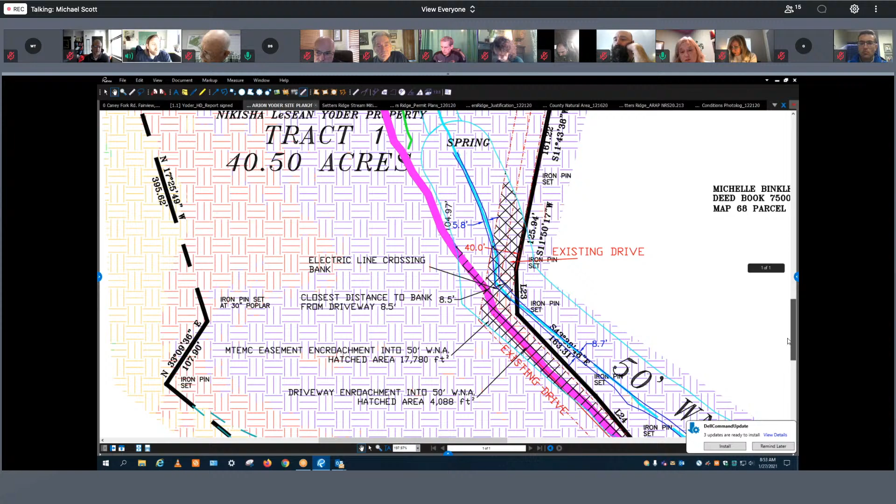Yes, so the request is to install a driveway and clear for electric overhead utilities, and part of it runs within a 50-foot stream buffer. And then the building site is further back on the property away from the creek, but the waiver is for the driveway and the electric to run within a portion of the 50-foot stream buffer. But it looks like their property is on the right-hand side of the road. Are y'all going to do something to the bank over there at the creek, or make more erosion down our way in the creek there?

I don't understand. They're wanting to waive it because of the creek bank. That's what I was concerned with, because my kids play and swim in the creek. Now we got developing going on around us, and every time it rains, a half-inch rain, it looks like chocolate milk running down through there right now. It didn't used to be that way. That's my concern. But if it's up on that hill, why would that be affecting the creek bank? I guess is what I'm asking. Why are we trying to waive this section? Well, this is a tributary. This is a smaller creek. This isn't Caney Fork proper. It's a smaller tributary that runs along the edge of Mr. Yoder's property.

Okay, and the driveways. I mean, that's what I'm trying to figure out. Whatever erodes down in there. I mean, how much erosion are we talking going down in there and going back down Caney Fork Creek down our way, and then eventually coming into South Harpeth where I live?

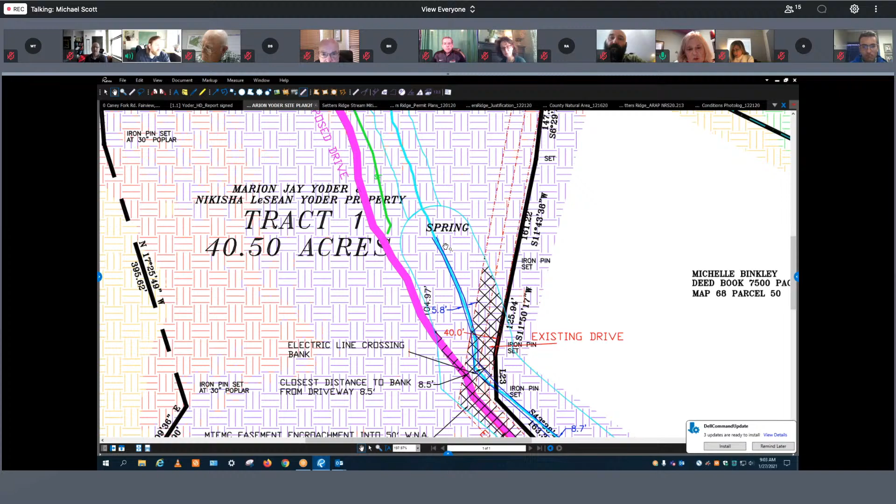And as a stream, obviously, that's when you get the waterway natural area protections. So if I transition over to the site plan here, the surveyor has located the spring to be consistent with Mr. Grove's assessment. And from that point down to Caney Fork proper, you've got an intermittent or perennial stream. Does that answer your question?

Yes, and I also wondered if we could get a more detailed topographical map. What is from the road up to the building site? What's the difference in altitude? The elevation difference, based on this county map, and it is hard to read. I can't make out the numbers here, but each one of these lines represents 5 feet. Yes, sir. So up here we've got 850s, 810s, and down here, just eyeballing, maybe 50 feet, maybe a little more. Okay, thank you.

Thank you, Michael. Maybe 75. It kind of depends on where you're talking about, because if you go down to the road, you're at 700 or lower, and up here you're up at 850. So total difference is like 150 feet. But if you're going up here from the spring, it's probably 50, 60, 70 feet of elevation change. Yes, thank you.

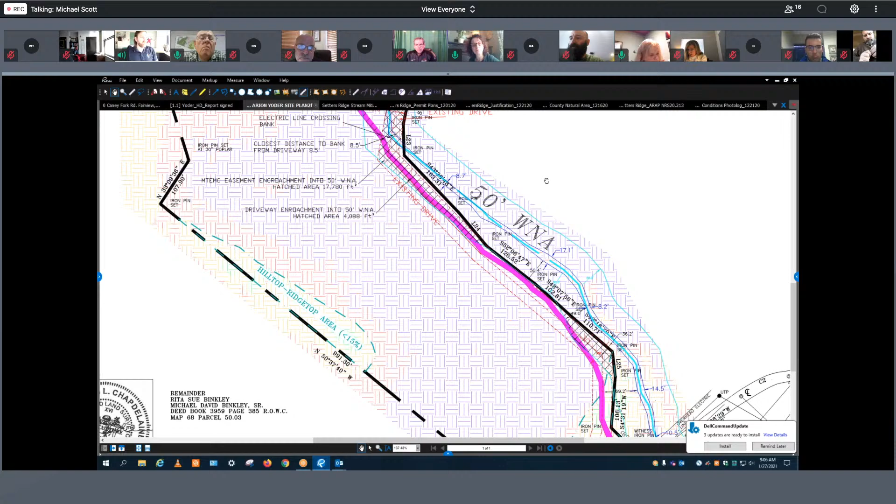So this is Michael. So the first requirement is to submit the assessment to the state, which we could verify, but typically these are pretty accurate. The next thing would be, with his crossings, he would have to be consistent with any state ARAP permitting. For an overhead crossing, I don't think you have to formally submit any type of application to TDEC. You would just go based on their general ARAP permits, which are available online, and you can look through those.

An aerial crossing, you can typically do that without submitting any information. It's only when you have a certain width of crossing, or you're needing an individual crossing, or other things that you'd have to formally submit an ARAP. So in this case, I think he would probably just follow general ARAP permitting.

Thank you. Michael, will you leave that right there? It says electric line crossing right in the middle of your picture. Is that presupposing that the electric is on the stream side and then will be crossing? That's not what he stated in his proposal to us. Yes, that is a crossing of the electric across the stream.

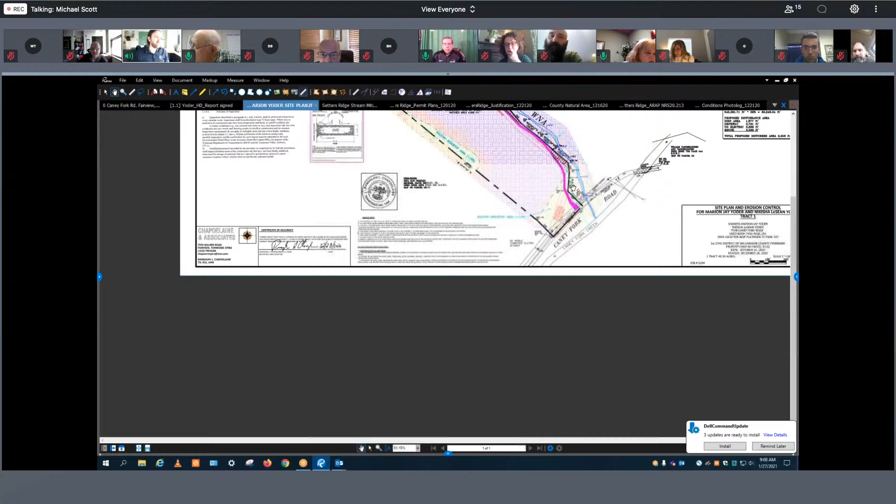Yes, the electric comes up, and I'll go all the way back down here, but the proposed electric comes in, I guess, from the south. Let me make sure I'm looking at this right. Yeah, it comes in from the south here, and it goes up and it follows the creek to the southwest. And then it will cross the stream up in the upper reach right here.

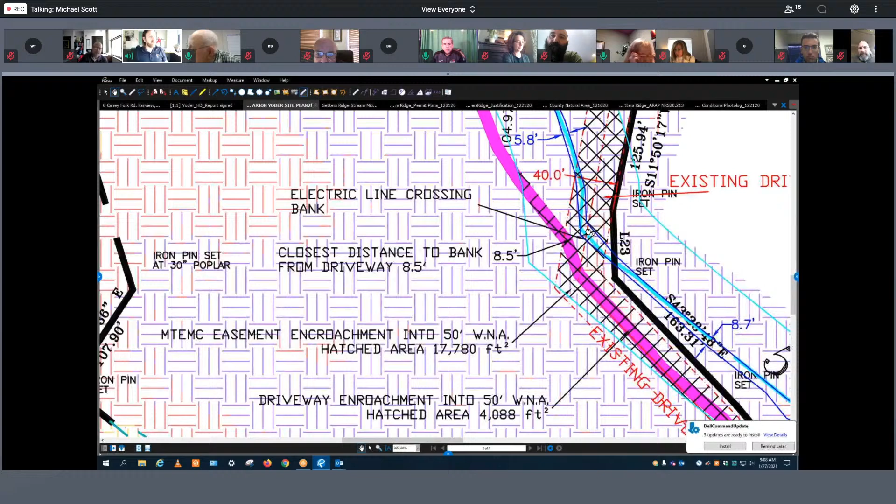But it doesn't follow the driveway all the way up to the house. It takes a separate route across the stream. It looks like it's on both sides of the driveway coming up, and so on. So it's not following the left-hand side of the rising driveway. It's got its own path. Is that a true statement?

Correct. It splits right here, and the surveyors cross-hatched the areas. That's what that cross-hatching is. But yes, they split the power and the driveway at this point. I guess my question is, is it a true statement that the electric will always be on the left side and we will not be clearing overhead on the stream side, or is that a false statement?

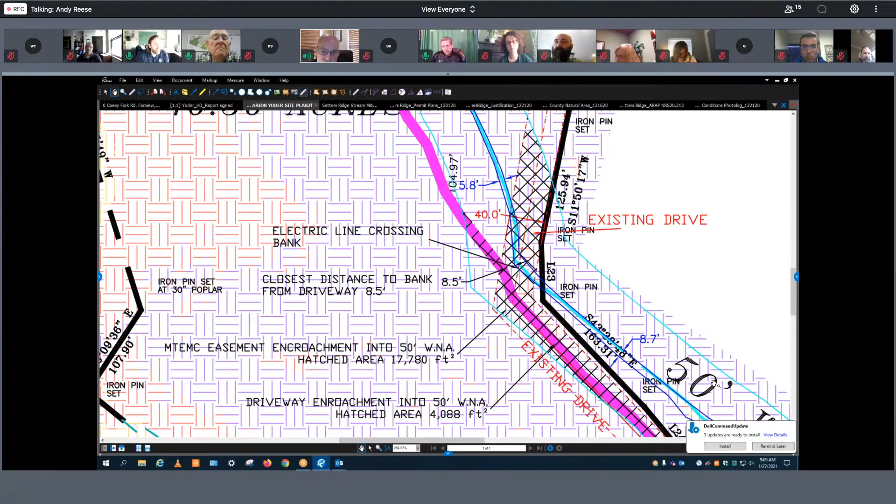Well, I think he would have to clear this 40 feet, which is over the creek at this point. Sure. I'm looking at the rising portion up to that split. Up to the split, it's going to stay to the south side. It's going to stay over here from the creek. Okay. Not sure that that's what it shows, but you have cross-hatching that goes on the creek side. On the north side? Yeah.

Michael, is it your understanding, and Mr. Yoder, that entire 40-foot easement, does Middle Tennessee or the electric utility require that it all be cleared, or will they clear that for you? What's the long-term status of the maintenance of that 40 feet? Yeah, this is Jay Yoder. The 40 feet has to be cleared by myself, which I plan on doing.

But as far as your question, yes, the driveway on the initial part up to where the electric crosses the stream, the power poles will be on the southwest side of the driveway. From there, it follows where the existing road runs north along the property line. There is still an existing drive there, and I'm running the power that way, but I'm not planning on taking my drive north. I'm planning to continue northwest up towards where it crosses the wet weather conveyance.

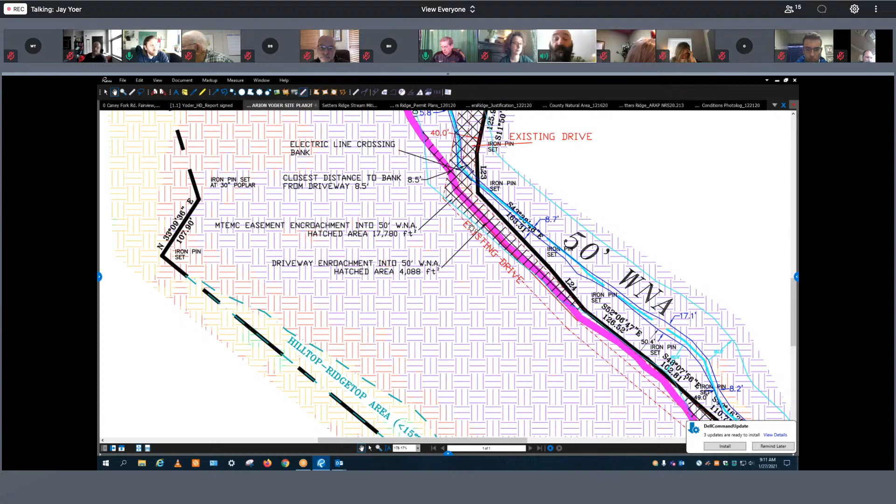That is correct. Right there where it crosses the stream, it's kind of tight, so I may have to clear that area. But beyond that, no, I'm not planning on clearing down toward the stream at all. I'm going to try to push it as far away from the stream as I possibly can, except where it crosses there, where I'll probably have to clear a little bit.

Floyd, any other questions? Were you asking about the long-term maintenance, Floyd? Yeah, this is Floyd. Michael, I knew that you had some understanding about what the utility required as far as that easement goes. Is it the same as any easement of theirs, they can come in and clear it if they want, or do they not do that on private property?

Yeah, so what they do is they hire subcontractors, depending on whatever bids, I guess, that they win. But they come out and if you don't keep it clear, they'll hire subcontractors to come out and clear it, pretty much at their will. And that could include anything from, I've seen, spray to just going out there and just cutting everything. But somebody's going to keep that 40-foot right of way clear in perpetuity.

Any other questions? Mr. Lamb, do you have a question? I guess I've gotten a little bit confused, so I just want to be sure. I want to kind of describe what I think is going on to make sure that I'm grasping it correctly. So based on the visuals we've seen, there is no crossing of the existing stream with the driveway. That crossing is only going to be in the wet weather conveyance area. The electric will cross, but it's going to be an overhead electric.

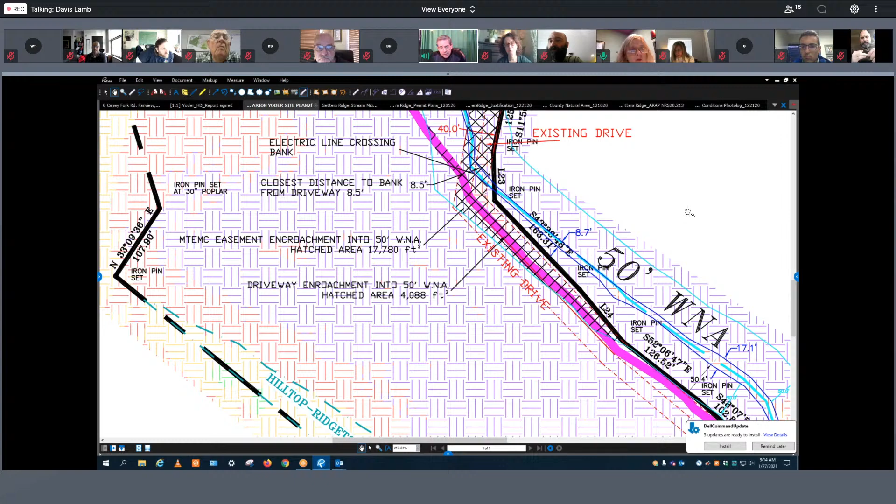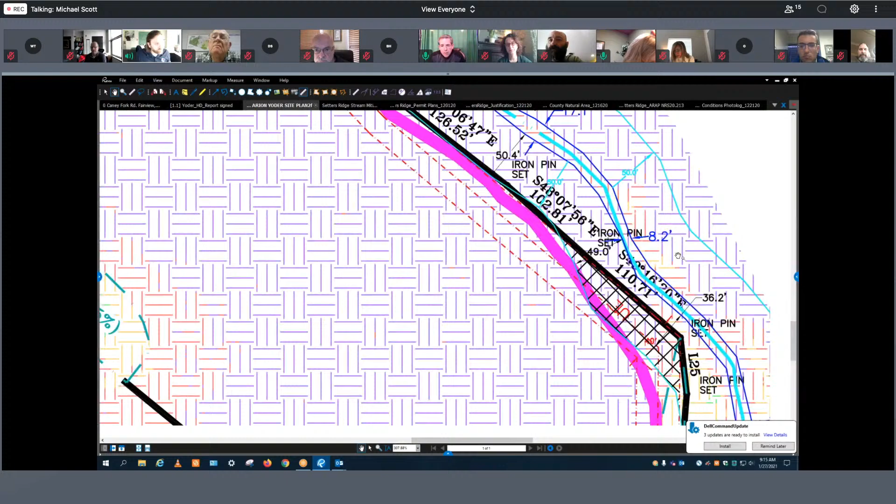It looks to me like we're 40-ish feet or so, or we're hugging the edge of our 50-foot, I think. I see a 50.4 distance called out. Right, it's 50 feet here. And of course, back in here is also inside of it as well. And he's got some points here and there measured, but he put this in square footage, like 4,088 square feet, but that doesn't help with the distance to it.

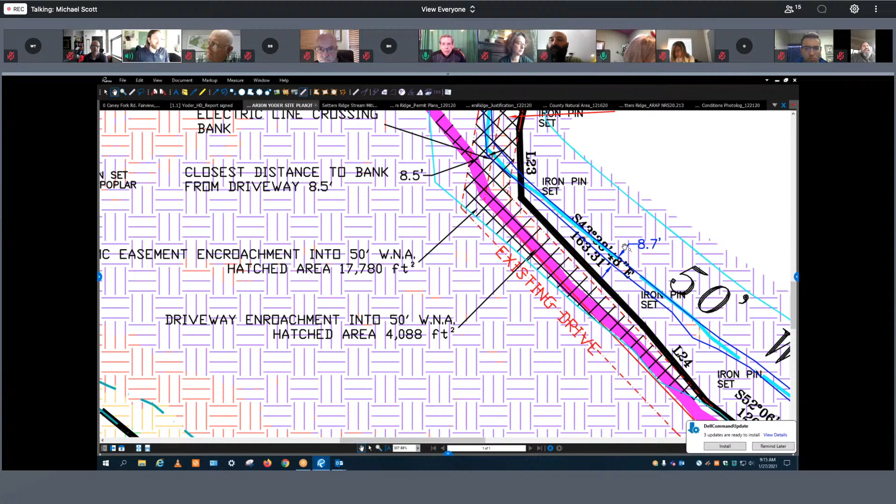I would say it definitely gets, I mean, if you would like, I could scale it. I don't know if that helps. No, that's helpful. And he's hatched, I guess, the areas that are for focus. I was just trying to make sure I was capturing. We're not crossing. At some point I got confused. We're not crossing the stream with the driveway, only with the overhead electric.

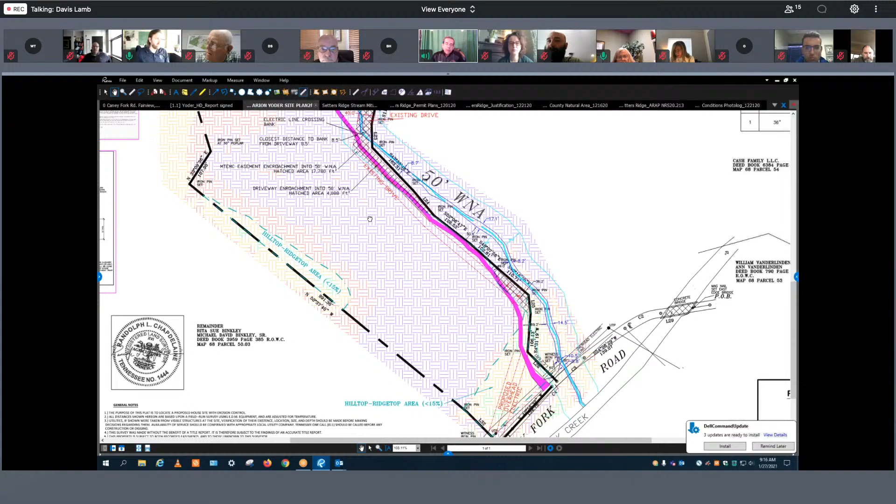I'll do one more, I guess, so that I'm not continuing to distract. The other thing that I heard Mr. Kinney say, if we get to a point of talking about a motion, that would make sense is for us to require a high side diversion ditch on the driveway. When we decide to move forward, that's something that's on my mind that I'd like to see us do. So with that, I'll be quiet and listen.

Any other questions, commentary? Thank you for the summary. I was about to think we needed to do that, Davis. I appreciate it.

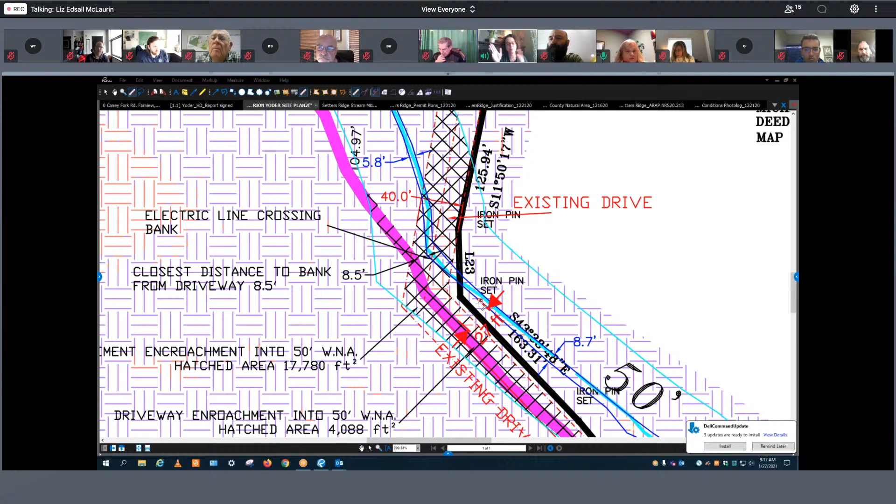This is Liz McLaurin. I do have one other clarifying question. The summary states that the driveway and electric would run parallel with the stream, affecting approximately 600 feet of length in the WNA. So is that still accurate, based on the fact that I now see there is a split that makes the driveway not cross the actual stream, but just the wet weather conveyance?

Is that still correct, that we're losing, in a sense, half of the buffer, or it's disturbing half of the buffer, in the length of 600 feet? Is that correct, Michael? This is Michael. Well, that's a difficult thing. What I did, just so you understand where that 600 came from, because there's variance within that.

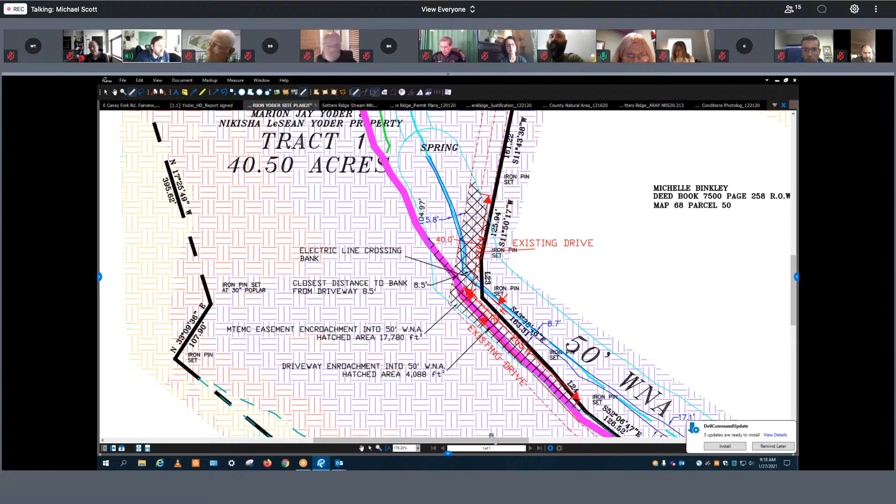Some places it's 5 feet of an encroachment, and some places it's 25 feet, or it's right across it. I basically measured the hatched area that the surveyor had provided. So I went and measured the 170. It's hard to see, but 175 feet here, and this cross-hatched area I measured here at 265 and down there, and I added those areas together. That's kind of where I got the 600 feet. I don't know if that helps or not. Yes, it does. Thank you.

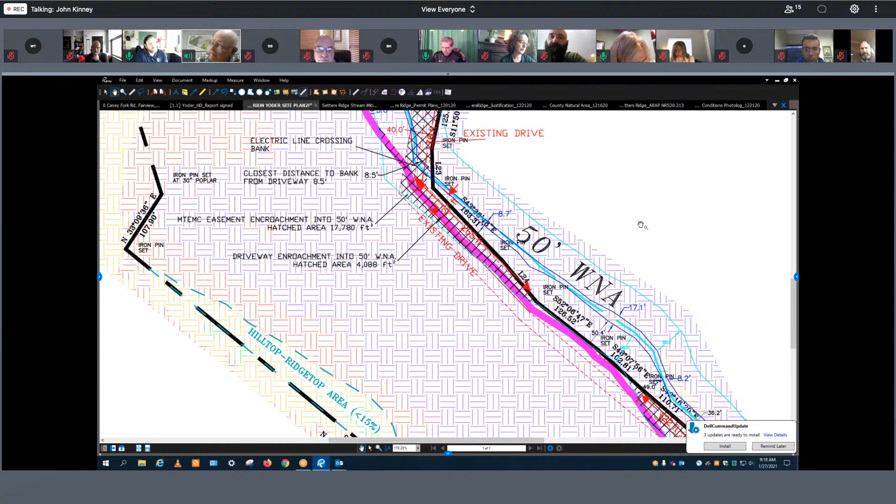Any other comments, questions from the board? Yes, this is Mr. Kinney. I went out and looked at the site, and the lower part of the road, at the bottom is a rock bluff there, and I don't understand why Mr. Yoder went around that way, because he's gonna have to blast the rock bluff down if you do, and that's gonna cause erosion from up above.

But to me, this road is where it was established to start with, and it's going to be hard to control the upper side, getting it sowed down with grass, but there's nothing else you can do there right now other than that.

But I'd like to make a motion on that to let the road stay where it is, have a ditch put on the upper side of the road where the water won't drain down across the road into the stream, put up a silt fence on the lower side of the road, no more land disturbance in the winter. What disturbance will be for clearing the right of way for the electric will be cutting the trees down, leaving the stumps to help hold the land. And somebody else may want to add something to that right now.

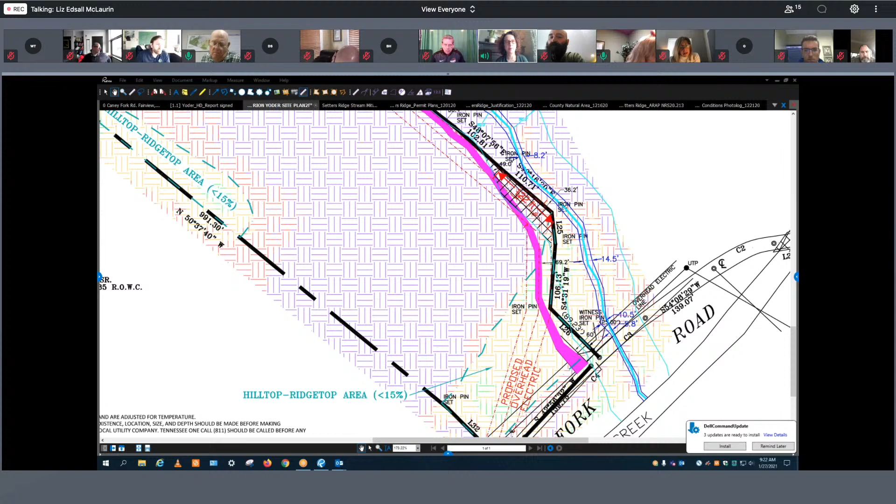Well, listen, Mr. Kenny, as far as the silt fence or sediment barrier, it doesn't have to be a silt fence. Like Mr. Yoder said, he was going to maybe put rock on that lower side to hold it. It's something that'll be permanent, where a silt fence wouldn't be a permanent thing. This is Liz McLaurin. I'm in concurrence with something that would be more permanent than a silt fence. Certainly, during construction of the road, that would be important, but I also visited the site and had more than an intuitive sense that there would need to be stabilization on that stream side of the road.

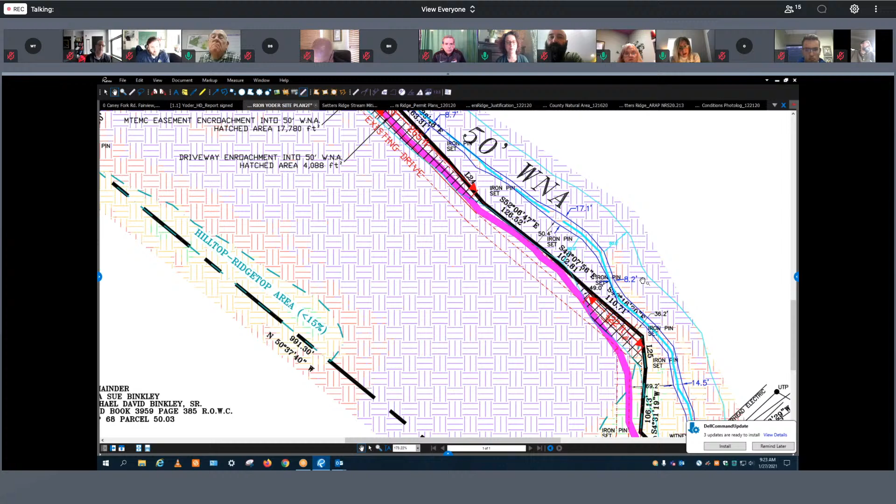Mr. Chairman, this is Christy Ransom. At this point, you have a motion pending without a second. So before there's any further discussion, there needs to be a second if it's going to be a viable motion. I second it. Okay, I'm just trying to clarify the motion. So we have a second. Any further discussion of the motion? As I understand, there are 4 conditions to the motion other than approval of the road. So it's the road stays where it is, number 1. 2, ditch on the upstream side. 3, a permanent sediment barrier of some kind, protection on the downstream side.

What was the 4th one? Oh, clear by hand on the upstream side. Not use equipment or whatever. Did I articulate those 4 conditions correctly? Does that seem what we said, Liz or Mr. Caney? Yes, yes, it is. Okay. Any further discussion on the motion?

Okay, hearing no further discussion, let's do a roll call vote. Christy? John Kenny, yes. Brad Hoot. Oh, he's recused. Recused. Floyd. Yeah. Betsy Hester, yes. Davis Lamb, yes. Robbie Adams, yes. Liz McLaurin, yes. Andy Reese. Yes. So the motion carries.

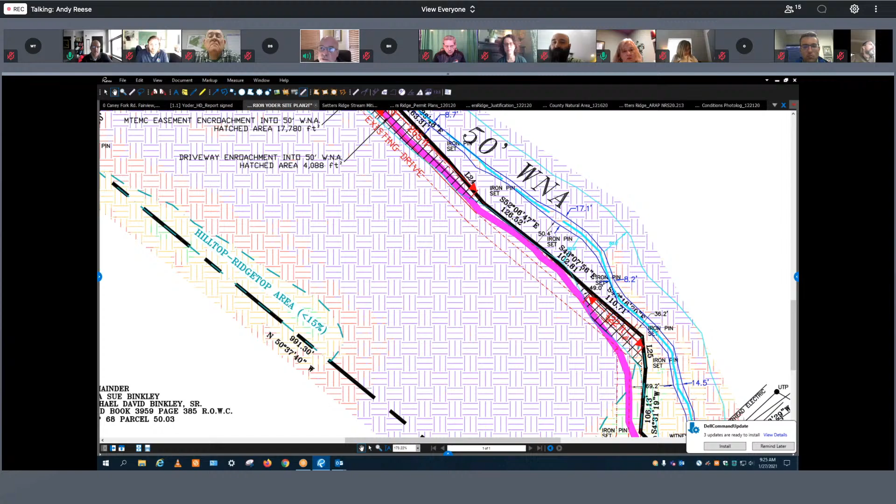Thank you, Mr. Yoder. Appreciate you coming to us and your efforts to put that home place up there and do it right. Appreciate that so much. Let's move on to the next item then, which would be item number 3. And who will be speaking for that item? Anthony, is that you? Are you speaking? Yes, I'm Anthony Brais. I'm an engineer with Resource Environmental Solutions, and I'll be speaking to that item. Okay, staff, would you introduce the item for us? Then we'll let Mr. Brais speak.

I'm sorry, Andy. Chairman, this is Liz McLaurin, and I am going to turn off my camera and mute because I need to recuse myself, as some of this mitigation is on land protected by the Land Trust for Tennessee, for whom I work. Very good. Thank you so much, Liz.

All right, item 3. Anthony Brais with Resource Environmental Solutions is requesting a waiver of Section 4 of the Williamson County Stormwater Management Regulations regarding the Waterway Natural Area for properties located at 9235 Horton Highway and 6811 Riggs Road. The applicant would like to perform a stream restoration project on approximately 17,000 linear feet of existing unnamed tributaries to Overall Creek and West Fork Spring Creek to improve floodplain connectivity, bed form diversity, lateral stability, etc.

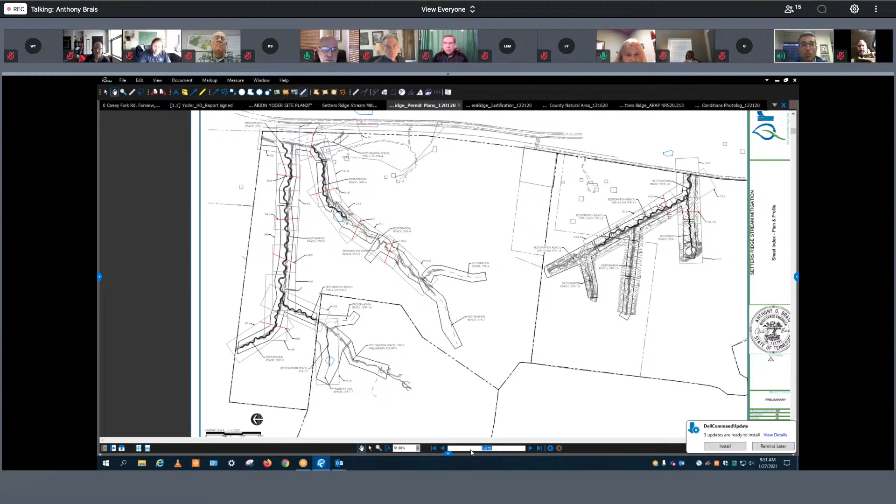Okay, and so again, I get that. My question really didn't have to do with the construction, it had to do with the construction material. Are natural drop structures viable for 20 years, 30 years? Yes, and the idea is that the woody material, if kept submerged, will not break down.

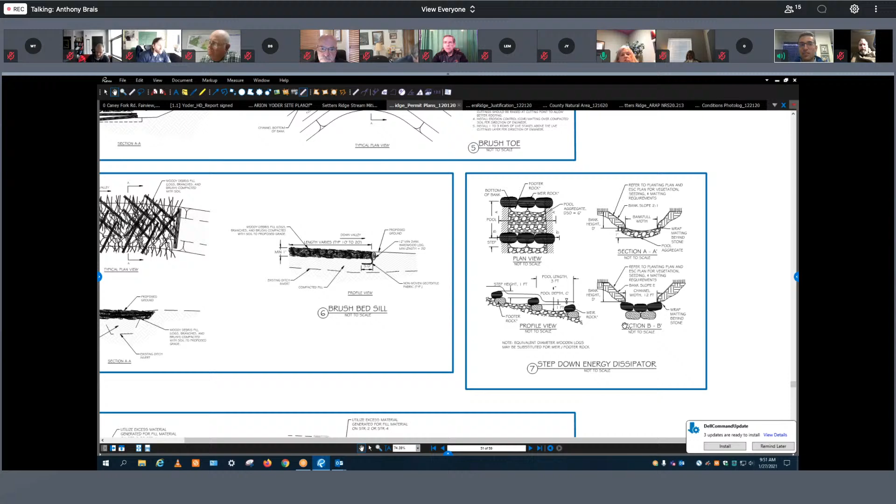The challenge that we've seen is that when we have a log structure, for example, in a stream that might not have sufficient hydrology, or may only be wet for a short time of the year, then there is an increased risk of degradation of those structures. But moving forward long term, that's the idea of having a long-term steward for the project that overlooks and oversees the project over time, and a monitoring budget for that long-term steward to do repairs if needed, as they come up over time.

One of the challenges in the stream restoration industry is really being able to predict 10, 20, 30 years into the future, given the variability of the natural environment. It's hard to predict what exactly will happen, but that's why there's money set aside for future maintenance at the start of each of these projects.

Gotcha. Last question, probably everybody's breathing a sigh of relief. You say you're doing construction in the dry, yet the overlay of the sinuous stream is on top of the existing stream. Can you help me understand the seeming contradiction in what you said and what you've shown?

Sure. In those places where there is some overlap between the proposed and existing stream alignments, those sections will be conducted in the dry via a pump around. There's a detail in the plans, but basically we put a coffer dam and a pump upstream of the work area for the day, pump the existing stream channel around to a downstream point, maybe 300 feet downstream, dewater the existing channel via pumps and place that into either a pumped water filter bag or some other way to get the sediment out before the water is discharged.

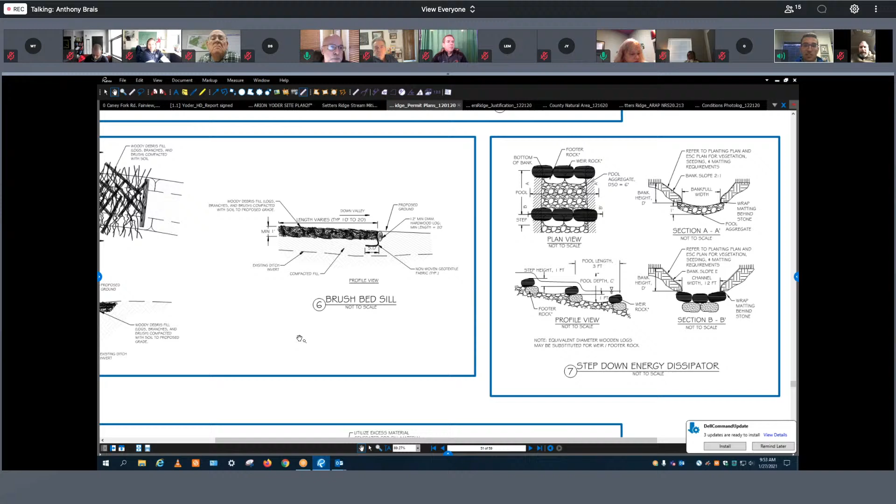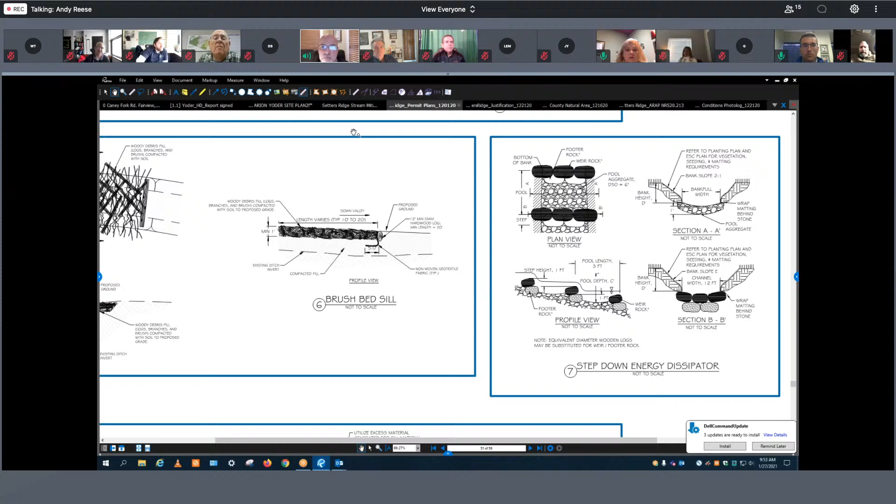Pump around's a great answer. Are there any other questions for the presenter? If not, let's close that portion and go into our board consideration. Do we have a motion? Mr. Chairman, this is Christy Ransom. We need to confirm that there's no one from the public who wishes to speak on this item. Oh, I'm so sorry. Is there anyone from the public who wishes to speak?

Were there any emails or other input, Floyd or Michael? This is Floyd. No, we didn't receive anything on this item. I just got one call from the property owner. I think he was curious about what it was about, but no comments. Very good. Any other public input? Seeing none, we close the public portion. Let's move into our board discussion. Do we have a motion?

This is Mr. Caney. I've got one more question for the applicant. Once this gets established and they're putting in waterers for cattle, are they going to be able to put a water line across these easements or not? I believe the intent is to use existing or proposed wells to provide the water, not necessarily a water line, but if needed, we can place a water line through the easement break.

All right, a conservation easement, does that run out in so many years or is it permanent? I believe it's permanent, and I can request more clarification from our legal counsel, but I believe it's permanent on the property. All right. That's all the questions I got. Thank you. Back to the request. Is there a motion concerning this applicant?